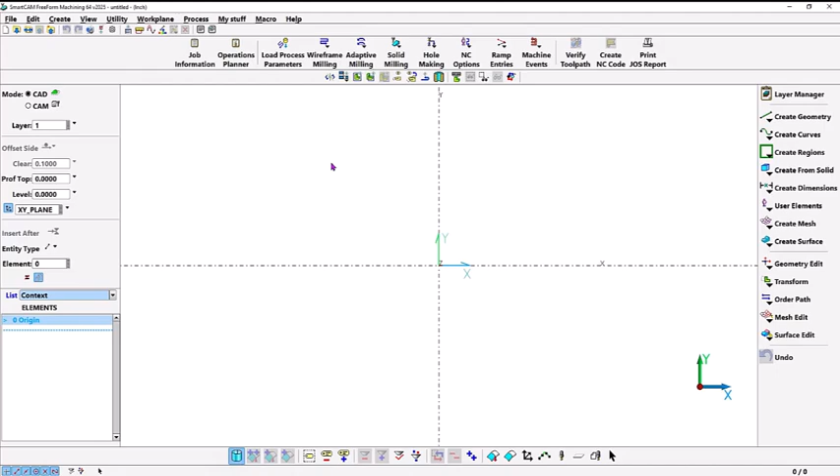I'm going to do a file, open, and I'll open up our part. So here's our part, and let's say that it's cut out of an extruded piece of aluminum. Let's say it's easy enough to create your own stock, but our designers actually had a model of the extruded cross-section of this part.

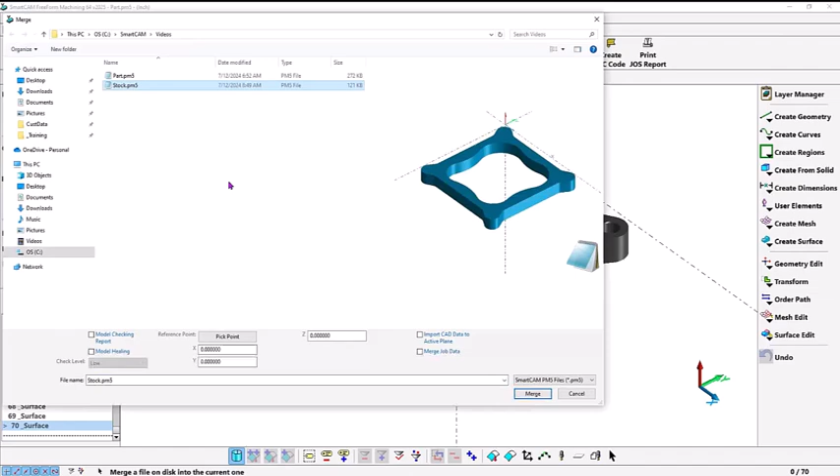So let's merge in our stock, and that's what we'll use to verify our cuts. I'm going to go ahead and merge our stock, and then we can start interrogating the part.

So let's look at the stock, the top of this. Right-click element data, and I can see that there's 25 thousandths of stock on the top that we have to face off. For creating our toolpath, we don't need the stock.

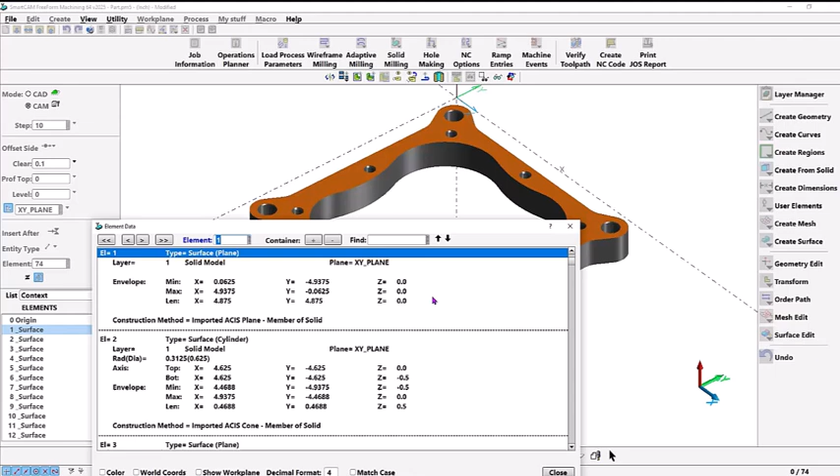We're cutting the part; we'll use the stock and verify to show the cut. So I'm going to hide the stock, but I'll right-click and hide that layer step. Then I can look at the top of this part, right-click in element data, and see that that's right at 0. So I've got 25 thousandths of material to face off the top of this.

Before we do any cutting, let's plan our cutting, and we can look at our planner. We're going to face the stock off with a 4-inch diameter face mill, finish the pocket and the outer profile with a 1/2-inch end mill, and then spot and countersink all the holes with a 1/2-inch diameter spot drill.

Then we'll drill the through holes, the 4 corner holes, with a 312 drill. Then we'll tap drill the 1032 holes with a 159 drill, and then we'll come in with a tap, tap it, and then we'll be done.

Then we can look at our job info. We can fill in all the stuff we need here, who's doing it, who it's for, etc. Then the machine—I'm using our example 3-axis milling center that ships with SmartCAM—on our work setup.

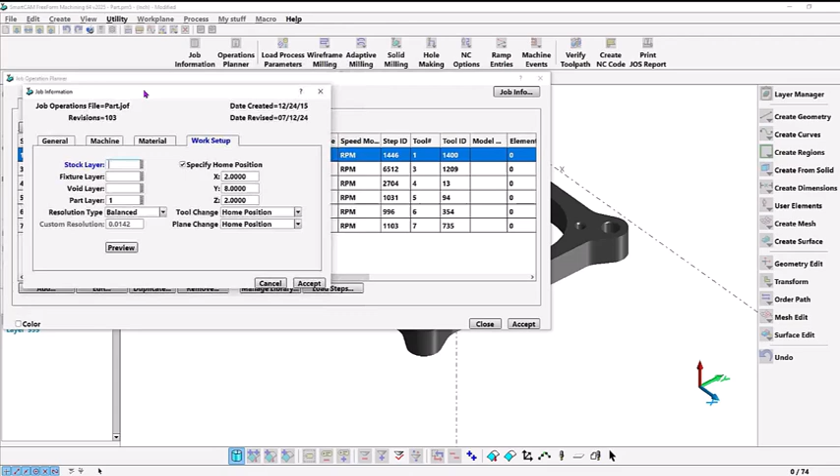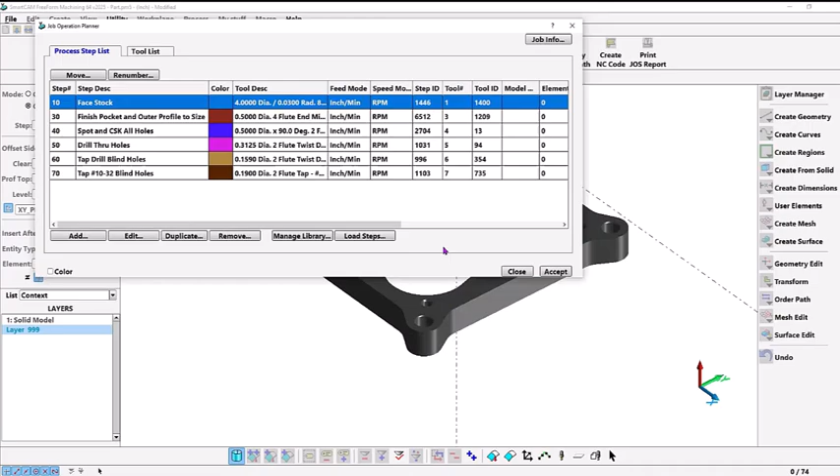We don't have our stock layer defined; I'm not sure what layer that is. So it looks like layer 999—that's where our stock is located. So I'll pick that, and we can preview it. I'll click preview, and I can see the stock show up over the top of our part. So we're all planned, and everything looks good.

So now we can go ahead and face mill our part. We'll just do that real simple. The level is going to be right at 0 on the top of our part. Prof top is 0.025, the top of our stock—this isn't really that important. And then we have a clearance of 0.1, so we can move our tool around above the part safely.

Let's just do this by creating a simple line. Actually, I'm going to get a top view, zoom out a little bit. I'm just going to create geometry, and I'm going to create a line. Here's 0 here, so our cutter is 4 inches in diameter, so we need to go minus.

We'll go 0.1, so we're sure we're not banging into the part. Then for Y, let me watch the readout line here as I move my mouse, and it says it's about minus a 1/2 inch. Then in X, might as well get that while I'm here—so it's square, I'm going to have 5 inches.

So we can do our first pass at, let's say, Y minus 1.5, and then it'll default to Z because the level here is at 0. Then we go to the X, so it's 5 plus 2.1, and the Y stays the same.

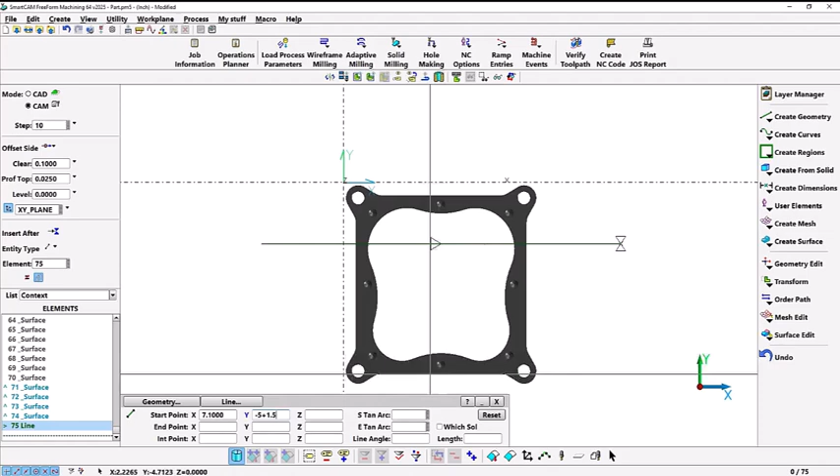So the X, I'll click in the X field, and then I'll snap to the end of this line. So we've got our X, our Y now will be minus 5 plus 1.5. So we're coming down to here and then going up 1.5. Z is still at 0. Then the X, I could type it in or I'll just snap it there. And then the Y is minus 3.5. And then we've got our 2 passes that will face this part off.

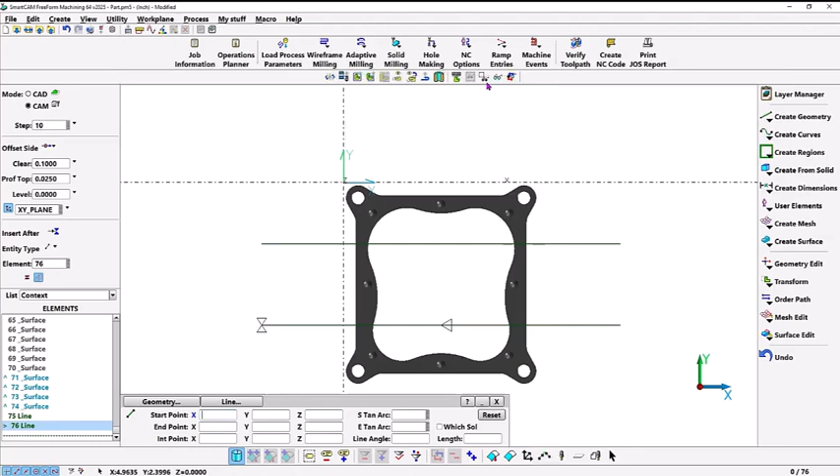So I'll get an ISO view. I'm going to go to verify. I'm going to toggle my stock on, move this, slow this down, and push play.

So it's kind of hard to see here. So I'm going to change the mode here to step. And I'll rewind and play it again. And now the cuts will be colored with the step color.

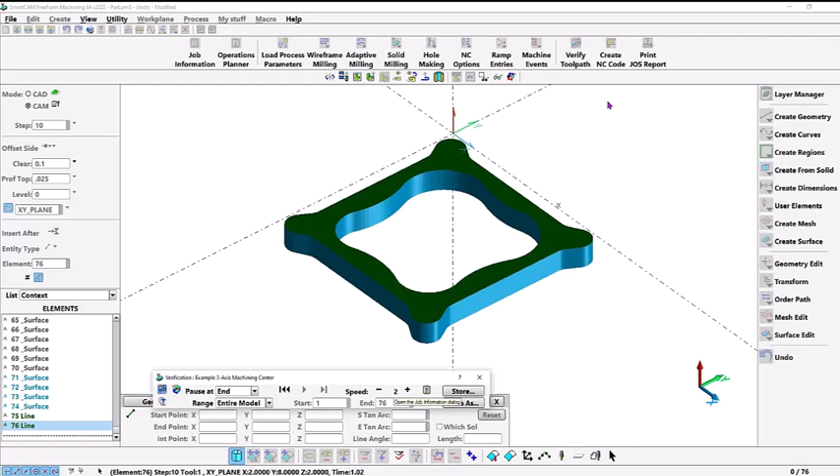Okay, so we've got it milled off. We've also noticed that the tool went heading off to the north there. If we look at our work setup, we've got our specified home position. This is where it went to X2, Y8, way out of the way, and Z 2 inches up above the part, plenty out of the way. So that's what that was all about.

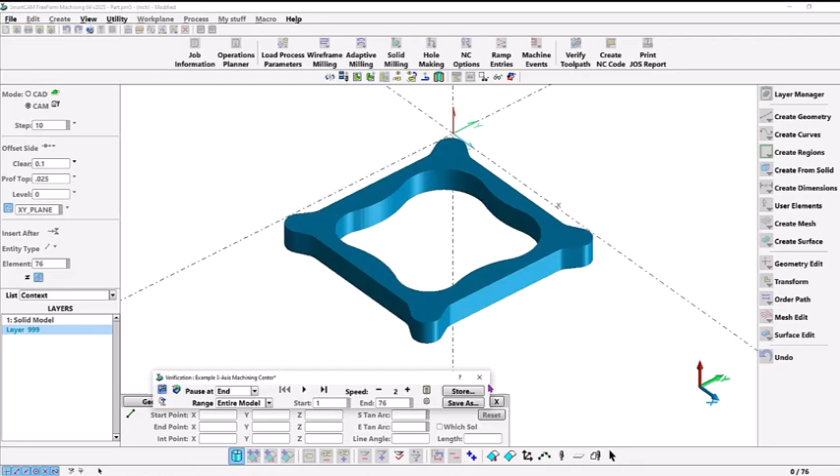Okay, so yeah, that's kind of in the way. So I'm going to hide this step. It's still there, just kind of out of the view for us. So I'm going to right click, and then I'm going to hide layer step.

So now let's go ahead and spot drill the holes. So that'll be with step 40, and then I'm going to do a create from solid hole. I'm going to pick any surface on the solid. We don't want to match the diameter. We want to get all the holes, the big ones and the little ones. We want to do the entire solid, and we want to match the Z-axis coming straight down. If we had this turned off, it would find the holes coming up from the bottom as well.

So we should get 12 holes. So we should get 86 here, or 88. So we've got all of our holes. Now the problem here is that they're all to depth.

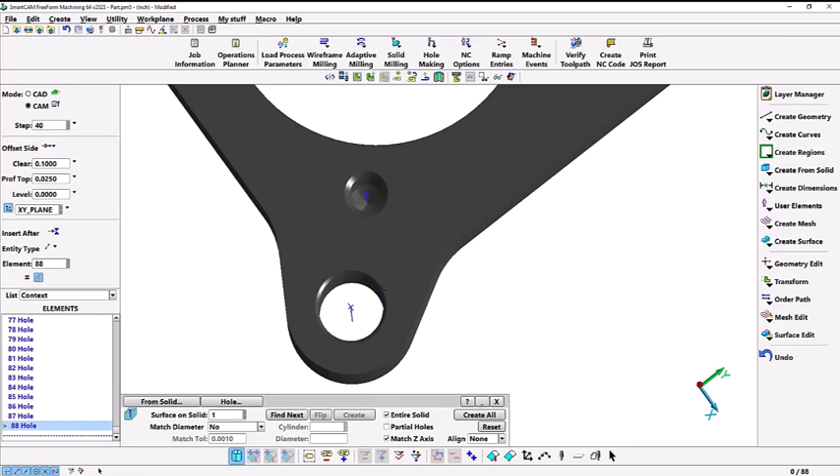So from solid hole knows the depth of the hole. Well, we don't want that for our spot drill. We want a spot diameter of this countersink. So the spot diameter here is 0.343. So let's start with that.

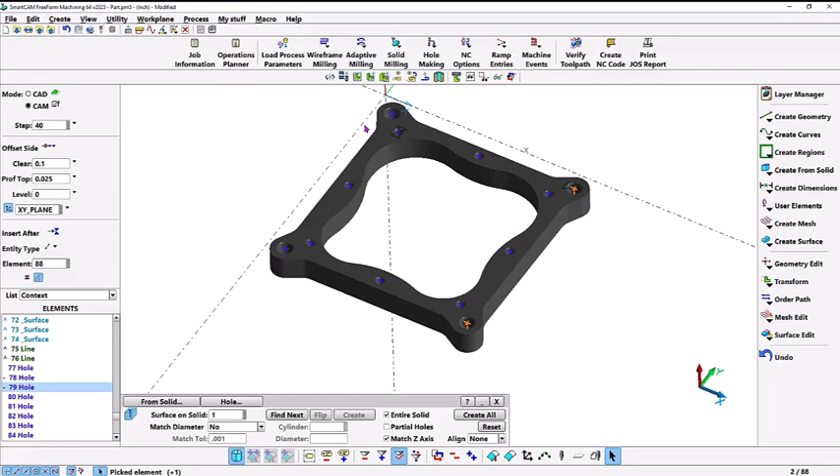And let's put those 4 holes in the active group. So I'm going to turn my filters on. And then I'm going to use my group arrow. The filters will filter out surfaces. So I'll do that guy, that guy, that guy, and that guy. So now I've got those 4 that I want to be a spot diameter of 0.343.

So now I can go to property change, holes and points, and then we'll change the spot diameter to 0.343. And then that should take care of that. And then let's do a new group and we'll get our smaller holes. All the different ways of selecting groups.

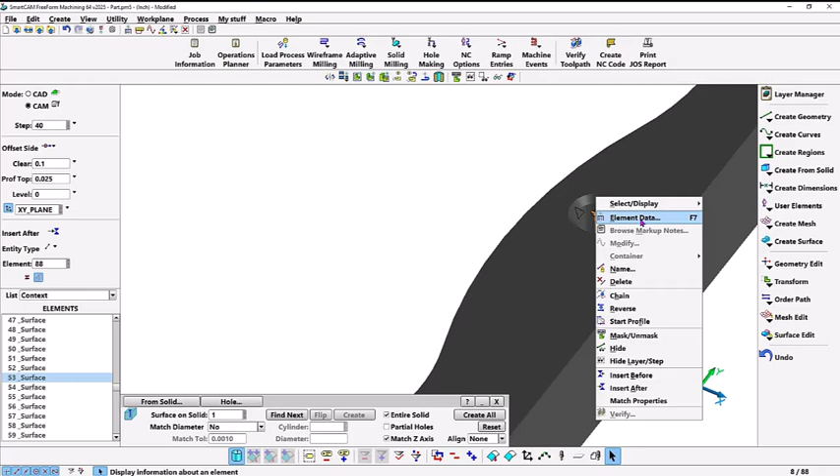And then let's go ahead and find out what that diameter should be. Oh, I've got my filters turned on. Turn the filters off, then I can get the element data of that. And that's 0.21. So now I can do the same thing, property change, holes and points, and then change that spot diameter to 0.21. And then that should take care of that.

Let's verify that. So verify. And then we come back with the spot drill.

I think I would like to see the spot drill a little more optimized. So what I'll do is my step picker, select elements of this step and put the spot drill in the active group. And then I can go to order path optimize. And I'm going to say up at the upper right corner, so I'm going to say 5 by 5. I'm going to pick closest.

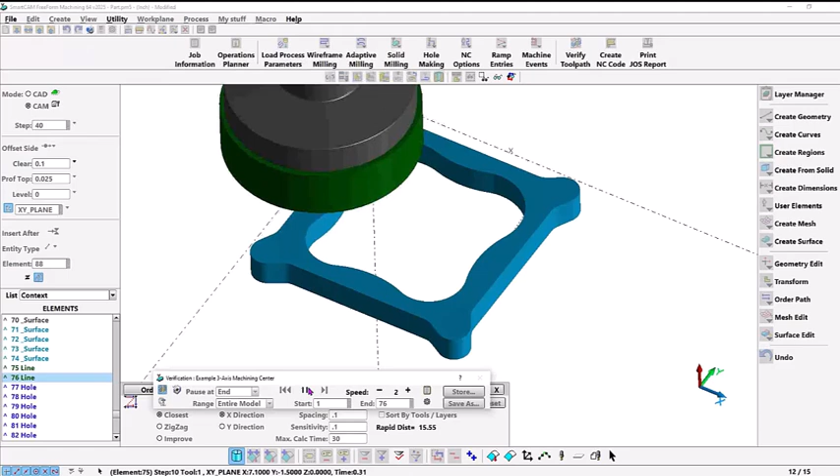And I'll hit go. And you can see it's kind of hard to see against the dark background, but let's just verify it. And you can speed this up and slow it down as it's running with your numeric keypad.

Yeah, I like that better. Okay.

So now let's drill the through holes. I'm going to go ahead and hide selected, and now let's go with step drill - yeah, I think it's step 50. And we'll go back to create from solid hole.

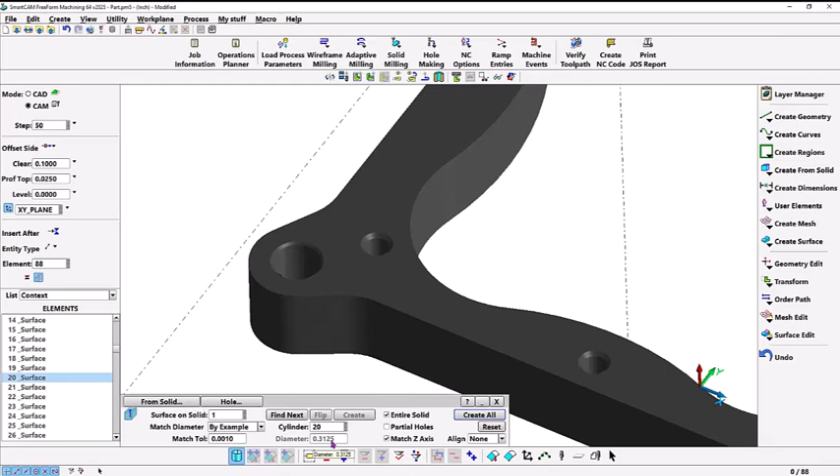Pick a surface, any surface on the solid, and this time we want a match diameter. On this first one, I'll go by example, and then for the cylinder, I'll pick that cylinder. And notice, even though it's dimmed, it filled in our diameter.

And I think that's all we need to do. Just create all, and then that looks like that worked. So now let's go with our other drill, or tap drill, which is that one.

And then this time our cylinder will be one of the small ones. That updated the diameter. Create all. And then let's change now to our tap, and that should just add 8 more holes.

And it does. Now the drills and taps all knew the depth of the holes, so we're good there. We'll take and verify this.

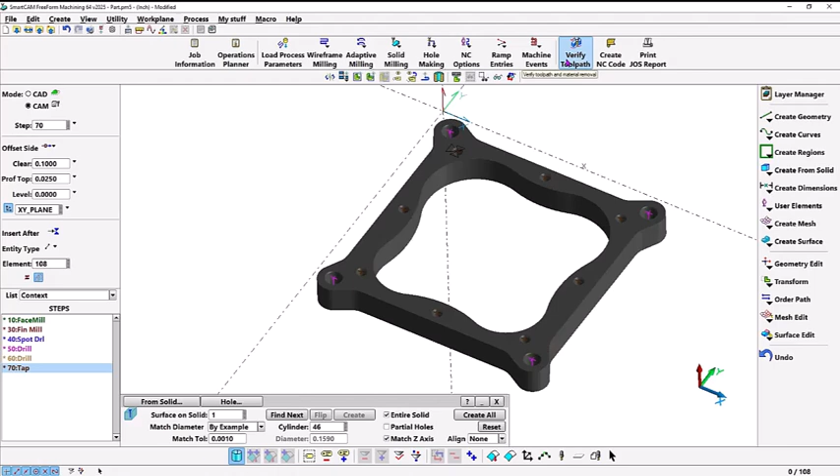And see that, speed it up through that. The spot drill, now slow it down.

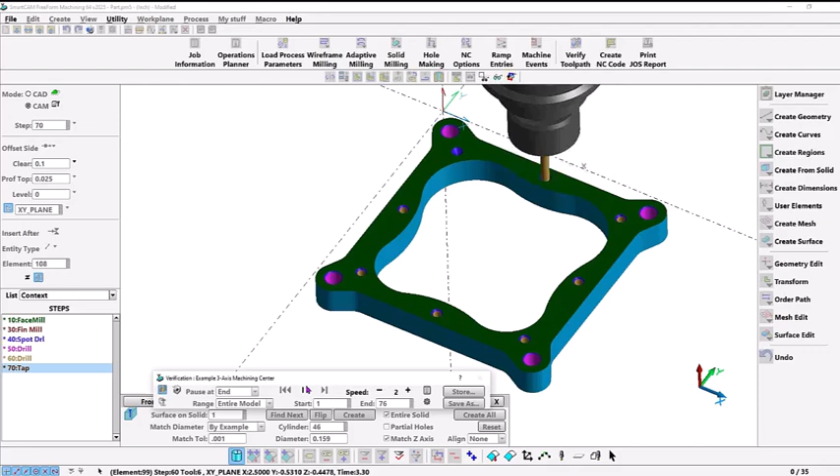So it knew the depth of those holes that they were through. It knows the depth of these holes. And then the taps. You can see that it knows the difference between the blind holes and the through holes.

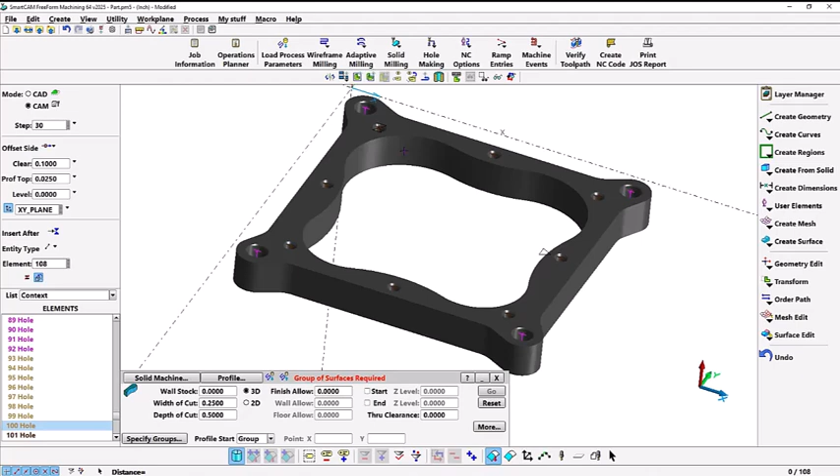And I'm going to use the tangent and adjacent picker. What I want to do is to take and put all of that in the active group. We want to profile mill all of that. And then we'll go to more.

And we'll pick our leads. Yeah, I think that looks okay. We're going to lead out that matches. I'll accept that. But right now, we need to let it know where to start.

So let's let it start somewhere up here. Let's go with the single and the point. I'm just going to snap a point somewhere near here. So we'll do it over on the left side.

And let's do a through clearance of 0.02. Let's make our depth of cut a little more than a half inch, because that 0.02 will give us 2 passes. So let's say 0.75 for the depth of cut. And I think that should do it.

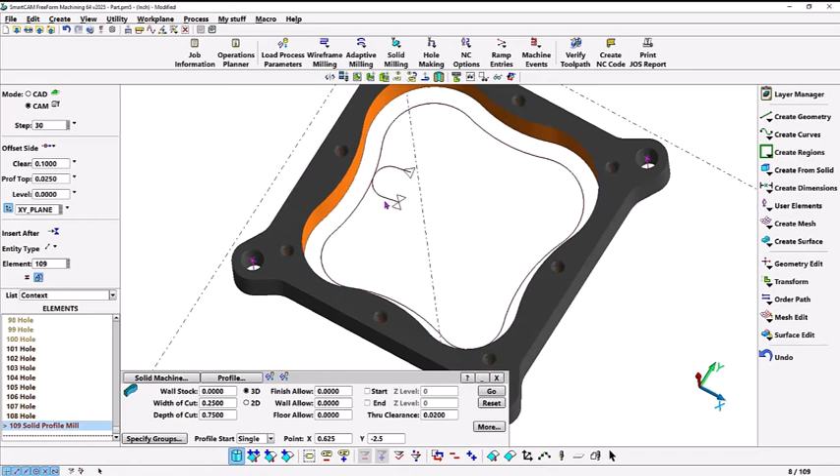And there's that. Well, it didn't put it in the right place. Start point. Snap there. Okay, so I just snapped to the top of the hole and then I got it close to that side. Well, let's go ahead and verify this.

Speed up all the facing and drilling and whatnot.

Looks good to me. So basically all we got to do now is do a new group, and again, with our tangent picker, do that and just do the same thing. It should put the lead out in and out on the back side, and that should complete our machining of this.

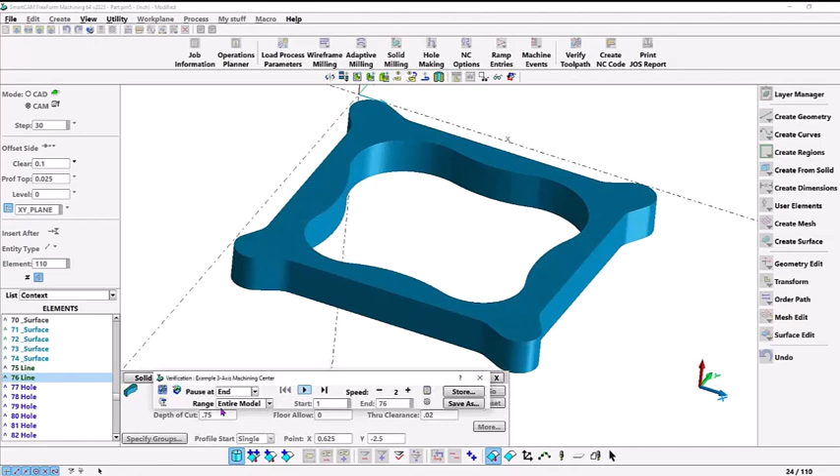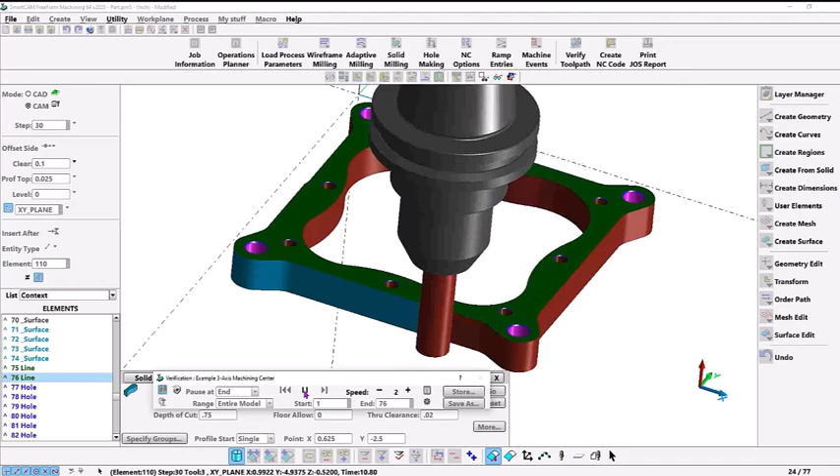Profile the inside and then profile the outside. Okay, and then if we can look at our part, we can see that it's all machined all the way around. And going to call that good.

So now all we got to do is just go to Create NC Code. The machine is still our 3-axis machining center. I'm going to do an open code file, and then there's our code.

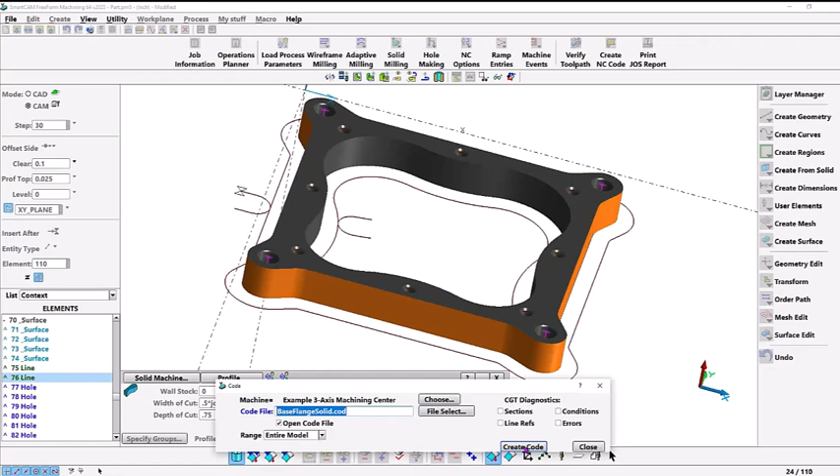This information all came from the job info, so on and so forth. And there you go.